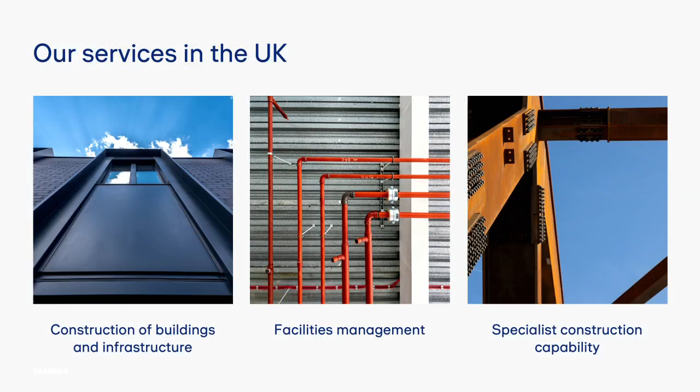So a little bit about Skanska UK, for those of you who may not be as familiar with us. We're part of one of the world's largest global development and construction organisations, and it's an organisation that's been 135 years in the making. We've been around for a while, and we've been in the UK since 2000. With over 30,000 employees across the world bringing their knowledge and experience to the organisation, and 3,500 people in the UK. Globally, we operate in the Nordics, Europe, and the US.

So why are we here today doing this webinar? Well, you'll hear from Adam and Conor a bit later on that we actually set our net zero target in 2019, and that was even before the UK government had set their target for the UK. So we were already ahead of the curve there. So why did we do that? Well, the executive management team here, we knew how important this was going to be for us. This is part of a global challenge, and it's absolutely in line with our core values as an organisation. We also realised that we needed to plan, we needed to invest, and we needed to scale up to meet the increasing needs of our customers.

So that was nearly 4 years ago, and a lot's changed since then. The market's matured, many other organisations have set their targets, and carbon is now a strategic business priority, not just part of our sustainability offering.

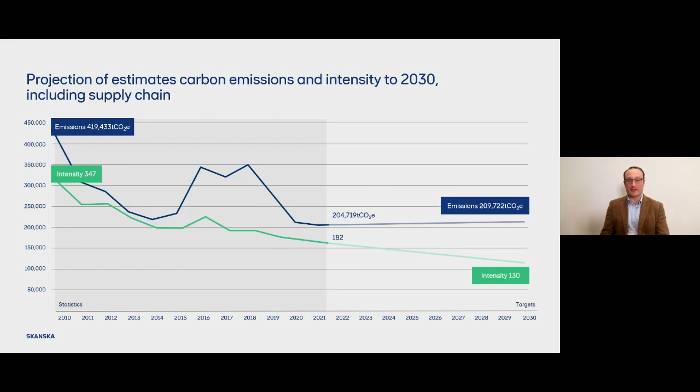So those three slides just show you the data, they just show you our emissions. What I'll move on to now is to give you a summary of what we've actually done within the company since that period, since nearly 4 years ago, since we launched the targets.

At the same time as we launched the targets, we also launched this thing called the Low Carbon Roadmap. I actually have an original vintage version of the Low Carbon Roadmap to show you here, one of the original ones. In that roadmap, it was basically a thinking document for our own leadership, and it covered 6 focus areas, outlining how we felt we would need to change our business over the next few years to embed carbon reduction into Skanska UK.

In effect, to make us carbon reduction ready to support all of our customers in delivering the decarbonisation aspirations they have for their projects. So how we need to set different targets and different measures, how we need to embed carbon reduction capability into how our commercial and financial teams think about setting and delivering contracts, how we need to increase the requirements for emissions on our plant and transport and collaborate differently.

So we started with that thought leadership document and turned that into a relatively simple series of actions. We set annual plans for the different parts of our business. Each part had to set an annual carbon reduction plan based on this roadmap, relevant to what they were doing in the business to move us forward. That was how we started 2019, 2020, 2021, and that's evolved to where we are now, where we're at the final stages of embedding this thinking into our business.

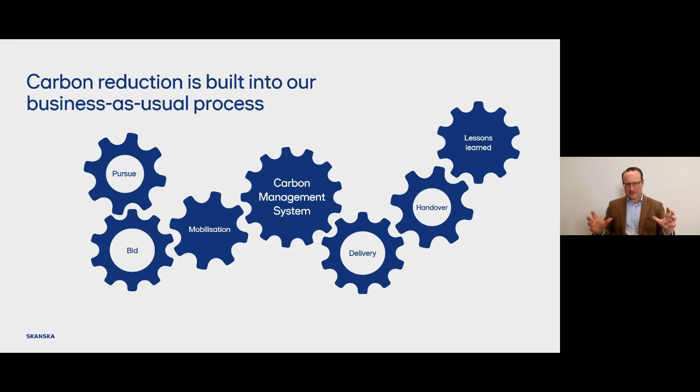So hopefully that's been a useful, very quick introduction into our strategy of how we've approached this. But I'd like to bring it to life a little bit with you for this next section of the webinar.

So we've done so much over the past 4 years, far too many initiatives, far too many carbon reduction solutions for us to share on just a 1-hour webinar. But we've picked what we think are the best examples and a summary of examples to give you an understanding that we're not just doing this on certain flagship projects or in certain areas, but we're embedding this capability everywhere.

And so we looked out on the market, and actually it was my colleague Conor, who's joining us on the webinar, that designed all of these courses. We looked out on the market, and there were some off-the-shelf courses that you could get around carbon literacy and the science of climate change, the why. But our people already understood the why, so we needed to deliver courses about the how.

So our courses are commercially focused. They're about what innovations are going to be coming online over the next 5 to 10 years that we can apply to projects. What are the commercial implications of applying carbon reduction solutions to projects? The different carbon reduction solutions have different cost implications on different contract types, really equipping our people to understand what the business of carbon reduction will be to support customers. So when you work with Skanska, you get trained operational leaders, procurers and designers on carbon reduction. And today we've trained nearly 500 of those key roles, and we're continuing to do that.

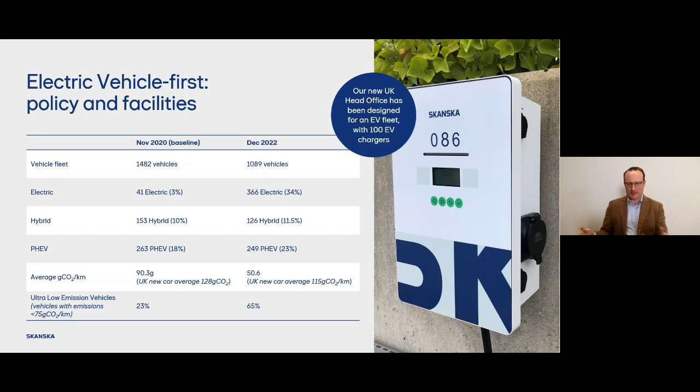As I said, it's not just electric, which we think is the future of transport, it's also hydrogen. And we're learning a lot about hydrogen, as I think the industry is. You'll see a few more examples of hydrogen solutions in the project slides I'll go through in a minute.

But this is probably the biggest business intervention we're making. We're in a consortium with BAM Nuttall and BRE, and we were successful in the first phase of funding for the red diesel replacement scheme, which was run by BEIS. I know BEIS has been reconstituted now into different government departments, so I'm not sure where that's ended up. But we're now in the process of bidding for the second phase of that scheme, where we're exploring how the hydrogen economy will work for the construction industry in terms of charging infrastructure, the uses of hydrogen fuel, and where it's best placed to work on construction sites. So that's something we're really excited about and will play a big part in our future.

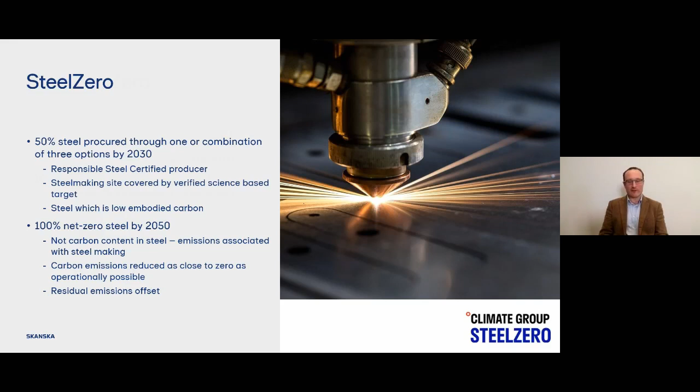And we signed up to the Climate Group's SteelZero initiative, which is an industry buying signals initiative to drive the industry towards net zero steel. We're a founding signatory to that. And then we're also a founding signatory to Climate Group's ConcreteZero initiative, which is again another industry buying signal initiative to drive the industry towards net zero concrete. So again, I'll talk more specifically about those targets when we launch our sub-targets later on in the webinar.

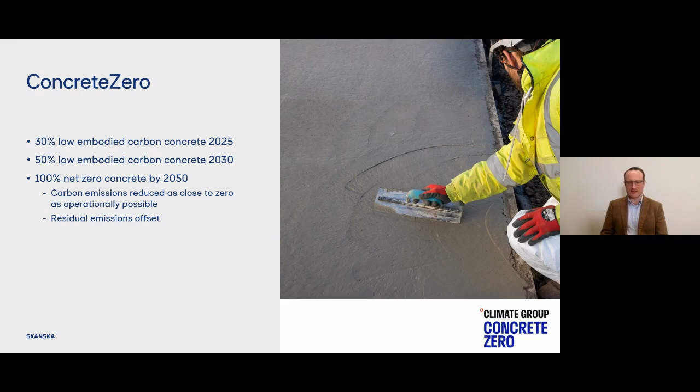So those are the main initiatives we've put in place corporately. And what I want to do now is take you through, very quickly, examples from our four main business sectors to show you, as I said before, we've got far more examples than we could possibly show you on the webinar, but to show you an example of the kind of approach each of our sectors is taking to support our customers and to deliver the principles from our low carbon roadmap.

So I'll start with our infrastructure and civils sector. And for all of our sectors, you'll see it starts with design and estimating. So we're applying the latest carbon digitals, latest BIM technology to make sure that we're designing the best, most commercially efficient carbon reduction solutions out on all of our projects and give our customers the best solutions. This is an example from the A428 project. It's a cost carbon dashboard developed in collaboration with Mott MacDonald for our customer National Highways. There, we're able to track all of the assets on the highway scheme, understand the implications on cost and carbon so that we can design the best solutions.

And you'll see on the next slide some of those solutions that we're able to deliver. I'm showing three projects here, examples from three projects. The first one is another project for National Highways, our M42 scheme, which is a traffic improvement scheme for some of the local area and a very important industrial sector in M42. National Highways, of course, have a very ambitious 2040 target for the maintenance and construction of their roads. So we're committed to supporting them achieve that with the best carbon solutions that we can. On that project, we delivered a low carbon concrete trial where we used an alkali activated geopolymer cement replacement, which is 80% lower emissions than traditional cement, along with a basalt reinforcement solution, which emits around 60% less emissions than a traditional steel solution.

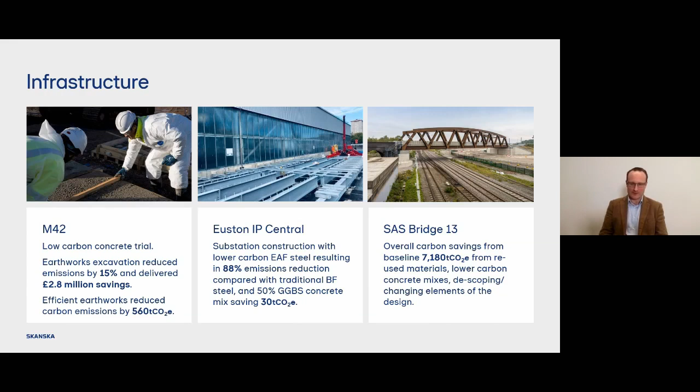But our largest project, and I think probably the largest project in the UK construction industry, is High Speed 2. Of course, we're working on this in joint venture with Costain and Strabag, so our carbon reductions are a collaborative solution there. HS2 have a target of 2035, a very ambitious target for construction and operation of their assets, and we're working very hard to deliver that.

There are so many solutions to share on this project, including us delivering HS2's first diesel-free sites. But on this slide, we've just picked three really interesting solutions that we think are worth sharing.

At the Victoria Road crossover box, which is where trains change track before they enter and leave the station, we've been using GeoPura hydrogen power units for site power, which we think will save 500 tons of emissions over their life cycle.

At Atlas Road, we've been designing a tower gantry crane base using earth-friendly concrete and reduced steel, and for that solution we'll save around 50 tons of emissions.

And then for the Euston approaches to the HS2 Euston station, we've been using another cement replacement, a 70% replacement mix, which will save around 157 tons of emissions from the baseline. So again, you see it's transport, cement and steel that are at the forefront of the solutions we're pushing on our projects.

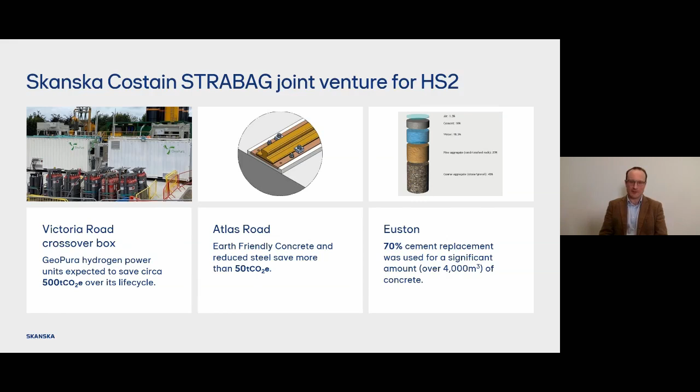And then finally, we'd be remiss not to include our long-standing partnership with Anglian Water. I think Anglian Water were probably the first large organisation in our industry to set a proper carbon neutral target for the full scope of their emissions, and they've been leading the way on carbon reduction ever since.

We've been happy to support them as a collaborative partner, as part of their At-One Alliance, supporting them in significant carbon reductions in the capital and operational phases, and also through an Ofwat funded project to help them develop a carbon modeler and better identify carbon reduction hotspots through BIM tools.

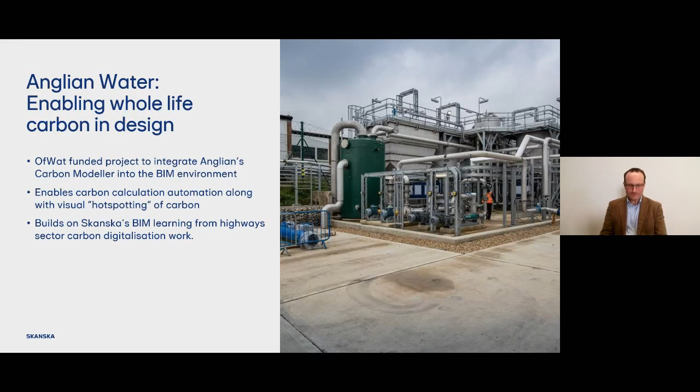So that's our infrastructure sector. I'll move on now to our second major sector, which is our piling, foundations and ground engineering business, based out of our facility in Bentley Works up near Doncaster, South Yorkshire. That's a picture of Bentley Works.

We refurbished that to a near zero environmental impact facility in 2015, using things like natural lighting, cooling, solar panels, and dual fuel heating that uses biomass. We've achieved a reduction of 40% energy usage in the workshop, and a quarter, 25%, energy reduction in the offices up there.

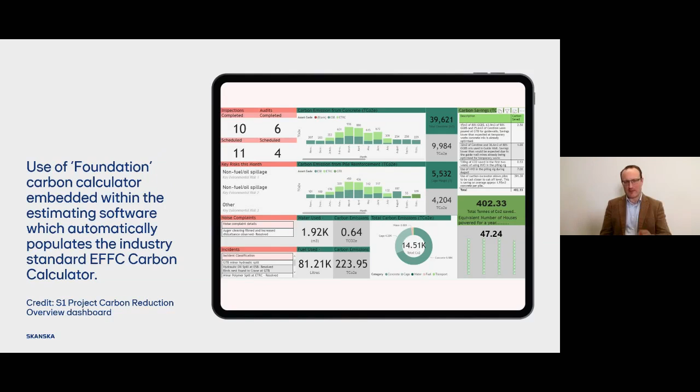It's a fantastic facility. But in terms of what we actually deliver on our projects, again in this sector, it starts by estimating and designing with carbon in mind. We use an estimating and design tool called the Foundation, which immediately plugs in carbon calculations from the EFFC carbon calculator, the European Federation of Foundation Contractors' carbon calculator. So just as with infrastructure projects, we design our cementation projects with carbon in mind right from the beginning, and we're able to achieve some fantastic results.

I'll show you a couple of those results related to concrete. This one's reasonably hot off the press. We've been collaborating with supplier Hanson to develop a 79% cement replacement mix for all of our permanent piling works on High Speed 2, where we're working on stage 1. We think this is the lowest carbon concrete of equivalent strength to be approved for use in permanent piling works, around 45% lower emissions than the baseline.

We've worked hard together collaboratively with our customer HS2 to get that approved, and we think it's going to save around 4,600 tonnes of emissions over the remaining 40,000 cubic metres of concrete that's still to be piled into that project.

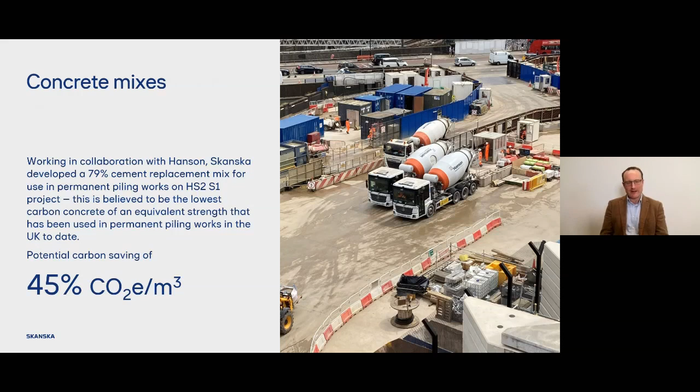Another example we won an award for. Again, we used that same technology we tried on the M42, basalt reinforcement steel with low carbon concrete, but this time applied in a low carbon guide wall system as part of our foundations business. We won the 2022 Carbon Reduction Award from the Federation of Piling Specialists for that intervention, which we're pretty proud of.

So we are working on concrete and steel solutions in our piling business, but also we've got to think about our rigs. Traditionally a very diesel heavy foundation and piling business, so we've got to be at the forefront of decarbonising that.

This is an image of our new Bauer EBG33 piling rig, for any of you piling rig aficionados on the call. It's an electric piling rig, one of the only ones in the UK, and we're saving about 1.2 tonnes of emissions per day through the use of that.

But we're also trialling hydrogen, and it's through our foundation business that we're mostly working on that hydrogen consortium I mentioned earlier in the webinar. We're trialling one of our own dual fuel hydrogen and diesel piling rigs - a hydrogen dual fuel retrofit forecast to run at about 50% lower emissions than a traditional rig. So we're trialing both hydrogen and electric solutions there.

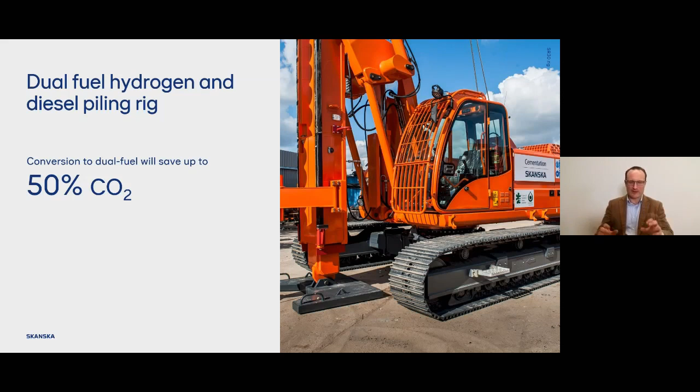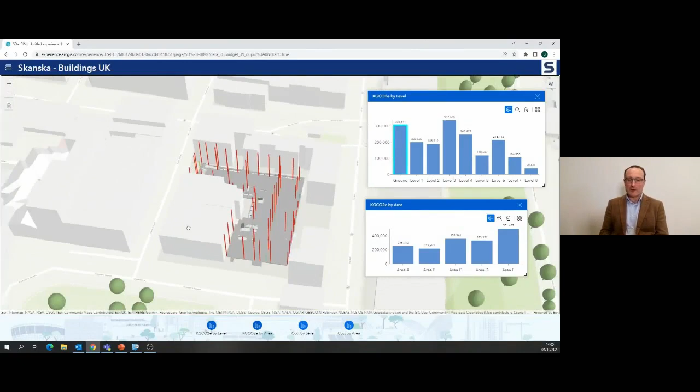Moving on to our building unit. Just like infrastructure and cementation, it starts with digital design. In our building unit, we use carbon and cost rates for the packages that we estimate, and then we get into detailed design. We use a 5D BIM data system plugged into a 3D modeling tool, where we're doing that exact same detailed design, looking at every single component, every single aspect of the building, and working out how we can reduce the carbon emissions to give the lowest commercially efficient carbon reduction solution to our customer.

Although you can't see it on this slide, this 3D model of London allows us to zoom out and then zoom into different buildings that we're designing across London, all on the same 3D map. And then we're plugging in different tools into this.

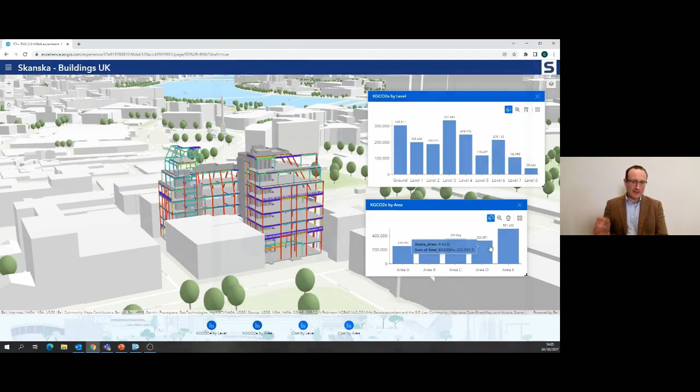What you can see on the screen here is a new reuse of second-hand materials tool that we're using. This plugs into the 3D model, links in all of the steel components of the building design, compares that with what live recycled steel is available on the market, and then tracks that into the model. So we're able to use recycled steel wherever it's available and will fit our design using a live link tool - another example of how we're doing digital design.

Now this project, 105 Victoria Street, is one I'm excited to share with you. It's actually the only project I'm showing on the webinar that we haven't actually started building yet. The reason I'm sharing it is because I wanted to highlight the ambitious sustainability ambitions of our client, BentallGreenOak. We're aspiring for this to be an ultra-sustainable project. It's going to be the UK's largest net zero office, an all-electric building, and we're really excited to be part of it.

What's really interesting is how BentallGreenOak and how we are approaching the design. We're including full supply chain in assessing the full scope 3 options for every part of the design. That's being tracked through design control, every aspect is scrutinized for carbon reduction solutions, and that's flowing through into contract packages. This is a really cutting edge, progressive, focused approach to designing lower carbon buildings, and we're going to learn a lot from it. We're really excited to see what the client can achieve from this project.

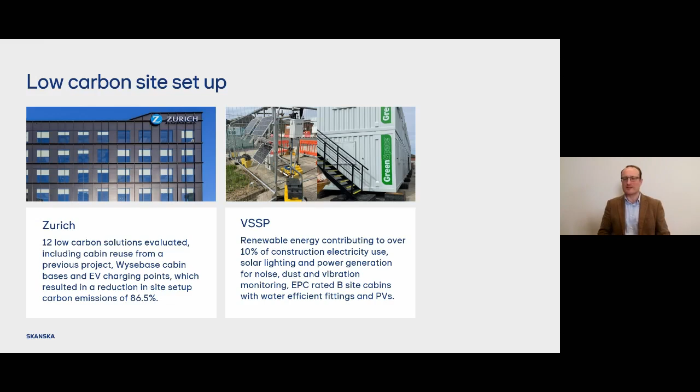Moving on to our final sector, building services. So not traditional construction, but where we work in FM, facilities management, and where we work in mechanical and electric, MEP, building fit out and retrofit. It's a different approach here.

Refrigerants are measured on what's called GWP, global warming potential. In this example, we've switched out a higher GWP refrigerant to a lower GWP refrigerant, saving around 222 tons of emissions in the operation of that hospital.

A completely different example is our project with Virtus data centers, where we've used our procurement of hydro-treated vegetable oil, HVO, to run in their generators, combined with a new approach to load management, so the generators are only working when the system really needs it. We're able to save over 66 tons of emissions and the client around £7,000 on that one.

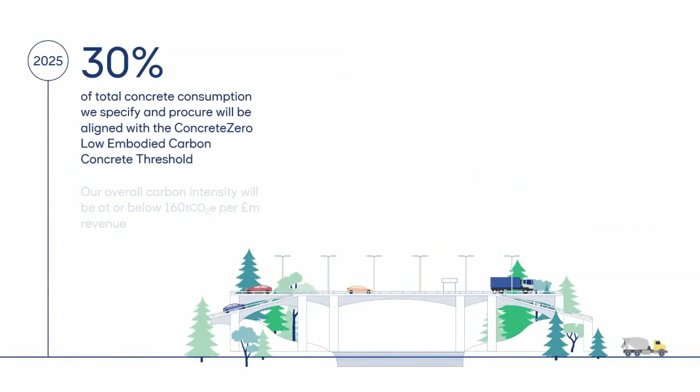By 2025, 30% of the concrete we procure and supply will comply with that concrete zero target I mentioned earlier. Concrete zero issues a threshold of how they define low carbon concrete and how much of it you have to procure in order to maintain your commitment.

And part of that, our overall carbon intensity as a business will be at or below 160 tonnes per million revenue by 2025, so that's just a couple of years away.

And by then, all of our projects will have a carbon baseline and will set and monitor against a carbon budget. Now, most of our big projects already do, most of our big building and infrastructure projects already do, but we have a lot of small projects in our cementation and building services businesses which don't necessarily have that, but they will by 2025.

By 2027, all of our light road-going commercial fleet will be net zero. And by 2028, all of our company cars we order will be zero emissions. We won't order anything that isn't zero emission.

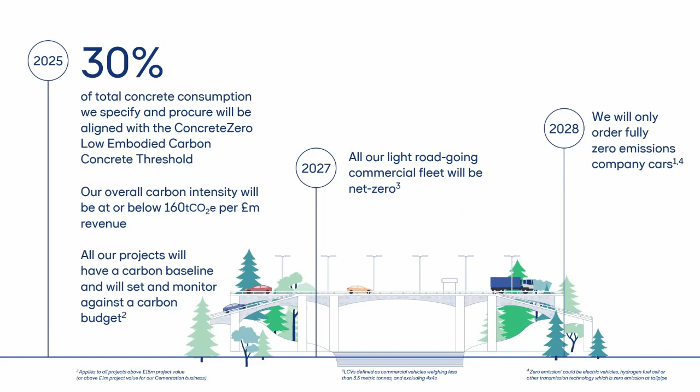And just at this point, I'd like to highlight the footnotes, which you may not be able to read when watching this, but you will be able to see when we publish these on our website later today, and when we send you the follow-up material. I should note that the targets relating to our company fleet, both the fleet average and the others, only relate to our company fleet. We haven't set targets for those who own their own cars and get a car allowance, or for short-term hires yet. We haven't got a solution or target for those. That's something we're working on.

So back to the targets. By 2029, we'll celebrate 10 years of certification to the PAS 2080 Carbon Management in Infrastructure specification. We were the first major contractor to become certified to that, 10 years before, in 2019.

By 2030, we will specify and procure so that 50% of our steel and concrete complies with those commitments we've made to steel zero and concrete zero. And as I mentioned in the building section, all of our site setup will be zero emission. We define site setup as 5 categories: electricity, generators, lighting, hoarding, and welfare accommodation.

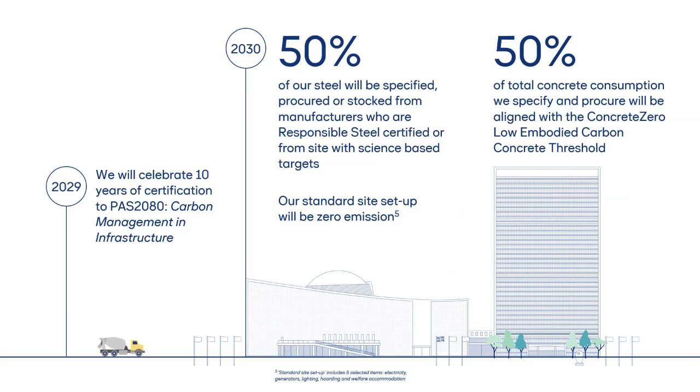Moving on, also in 2030, we'll celebrate a 20-year record of transparent Scope 3 emissions estimating and reporting, and all of our commercial buildings will support our developer targets in achieving net zero by 2030, according to the Building Better Partnerships Net Zero Carbon Pathway.

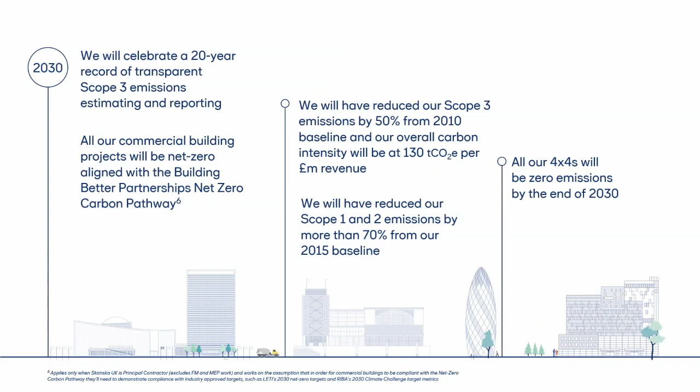Then you can see in the middle of the graph a restatement of our original targets: to be 50% reduced on our Scope 3 by 2030, and have our intensity at 130 emissions per million revenue by 2030. And then by 2030, all of our 4x4s we're committing to being zero emission by the end of 2030.

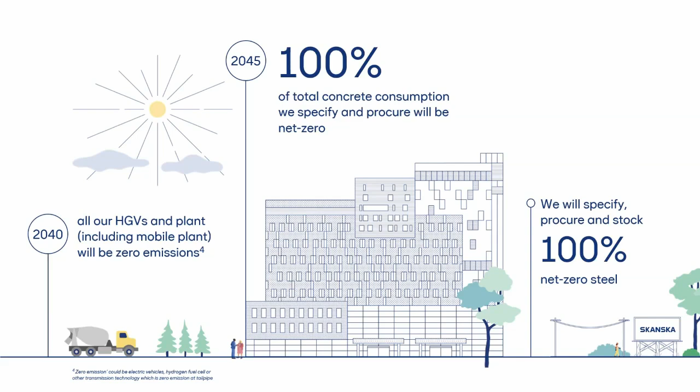And then this moves us to the last few years of our target cycle. By 2040, all our heavy goods vehicles and plant, including mobile plant, will be zero emission. 100% of the steel and concrete we procure will be net zero. That means we'll meet our Climate Group Concrete Zero and Steel Zero targets 5 years ahead of those public commitments. And that brings us into our main target of net zero by 2045 across all our scopes.

So that was a lot of detail to take in. I've just happily given you a very quick summary of those targets. They will be available on our website this afternoon, and we'll be sending them out to you so you'll be able to scrutinize them at your leisure.

But for now, I wanted to start the next section where we ended the last section, which is the year 2045. We set our target at 2045 back in 2019. We haven't changed that target. Other companies, as Katy mentioned, have set different targets, some earlier, some later than us, and we support those targets. Some of those targets are right for those companies. But I want to now hand over to our carbon manager, Conor McCone, who's instrumental in helping us set these targets, just to explain why we feel and continue to feel that 2045 is the right target for us.

Conor: Great, thanks Adam. So my name's Conor McCone. I'm the carbon manager for Skanska UK, and I sit in the central team working on our carbon strategy, but also supporting our projects and our customers to reduce carbon wherever possible. So as Adam said, what I'd like to cover today is why we still think net zero by 2045 is the best target for us, and some of the thinking about how we got to that target and how we review it continuously as well.

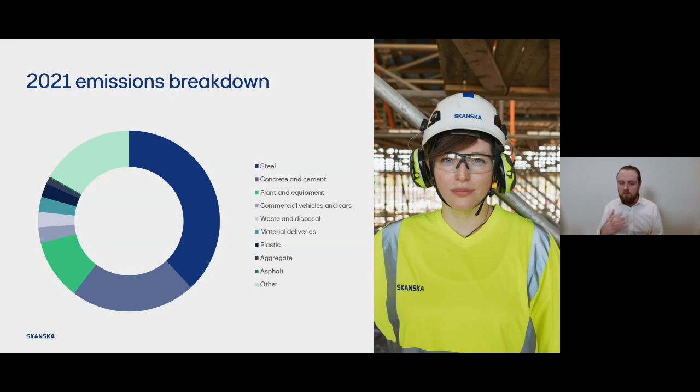So just to give you an overview of Skanska's emissions breakdown, this is it for 2021. You can see our top three emissions contributors are steel, concrete and cement, and plant and equipment. So steel and concrete alone make up 60% of our total emissions annually. And when you add plant and equipment to that, that brings it up to about 71%. So it was really integral for us to really concentrate on these three industries when setting our target and when looking into the projections to the future to ensure that they could be achieved.

So just to go over some of the major emission sources and net zero targets that are out there on the market today. Adam has taken you through the Concrete Zero and Steel Zero initiative commitments that they've set at 2050. And those initiatives think that for concrete and steel, these targets are ambitious but achievable, but not until 2050. For HGVs and heavy plant, the UK government has set a target that all new HGVs sold after 2040 have to be net zero. The key word there is new. So it'll only be new HGVs that are zero emission after 2040, and anything prior to that that isn't will still take time to filter out of our supply chain.

These are large, expensive bits of kit, and they can take a while to filter out of the supply chain just through the investment cycles. The same goes for commercial vehicles and cars. So the UK government's ban on sale of new internal combustion engine cars and vans starts at 2030.

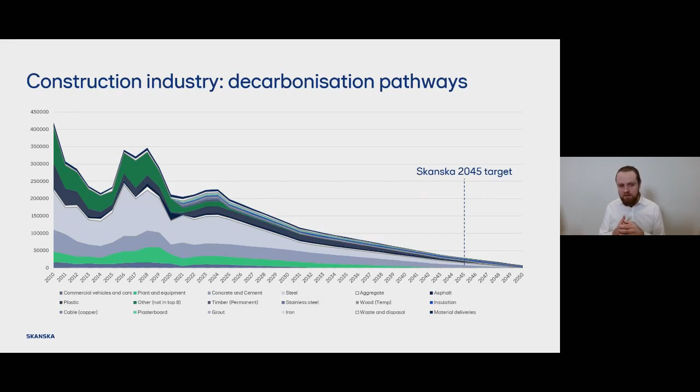So to go into this challenge in a bit more detail, I'll pass you back to Adam, and he'll talk about some of the things that we're doing to overcome these.

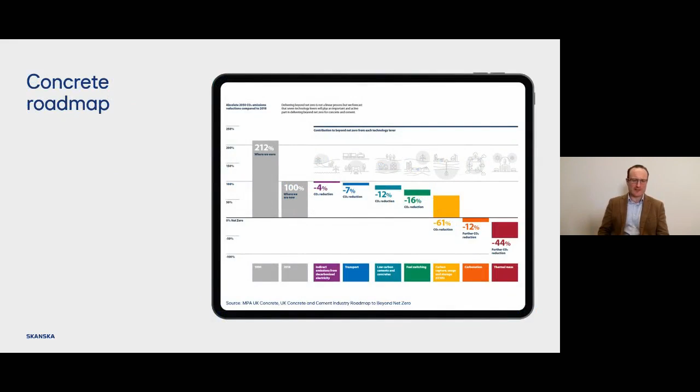Many of you have seen this Mineral Products Association UK Concrete and Cement Industry Roadmap. Let me emphasize this quickly: this is a roadmap from probably one of the most respected bodies on concrete in the UK. It takes ambitious forecasts and still forecasts that concrete will only be decarbonised to net zero by 2050, using ambitious reductions such as zero carbon transport, as we just talked about, different fuels, and changing product standards.

If you look there, you can see that yellow bar - 61% of the emissions reduction required to achieve net zero by 2050 is from an unproven, not-yet-scaled-up technology called carbon capture and storage. It's not yet clear to us that the UK has a clear plan to scale up carbon capture and storage technology to achieve that.